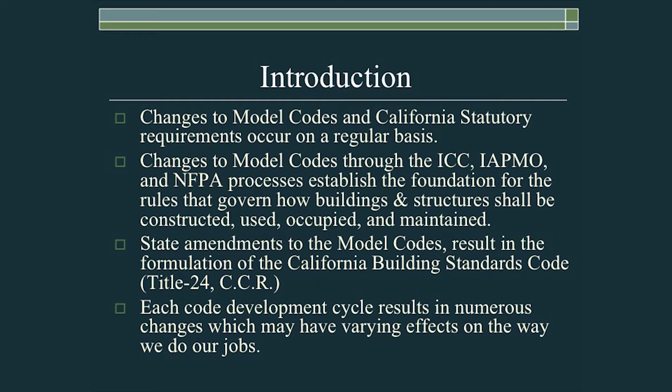Changes to model codes and California statutory requirements occur on a regular basis. Changes to model codes through the ICC, IAPMO, and NFPA processes establish the foundation for the rules that govern how buildings and structures shall be constructed, used, occupied, and maintained. State amendments to those model codes result in the formulation of the California Building Standards Code, or Title 24, of the California Code of Regulations. Each code development cycle results in numerous changes which may have varying effects on the way we all do our jobs.

Every triennial California code cycle is typically preceded by one or more comprehensive classes addressing significant changes. They're often presented by CALBO, ICC chapters, and various city and county jurisdictions. They tend to cover a really broad range of topics, including code changes which may not have an impact on your jurisdiction. Typically, these classes will be available later this year, starting in November, sometime around that point.

They generally require attendance at a full or half-day seminar, thereby taking staff away from their primary plan check or inspection duties. So, is there a quicker way to focus on the upcoming code changes that are most likely to affect you? It's actually why we're here today.

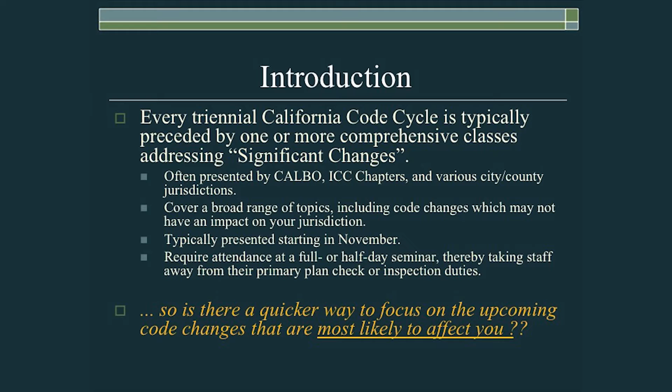The following changes to either the model codes or California codes have been selected because they are likely to affect most designers, builders, and code officials here in California. However, after publication of the codes, further exploration of the 2016 California codes is surely encouraged to identify other changes that may also affect specific projects.

There will be several comprehensive significant changes resources that have been developed by noted experts, and they will be available for those who would like a broader exposure to the changes we can expect in 2016. Let me talk about them very briefly.

First, the significant changes to the California Building Code. This is a fantastic resource. Paul Armstrong, Doug Thornburg, John Henry, and Jay Woodward, as we all know, are very familiar at developing these significant changes resources. And as they have in the past, they've done another outstanding job in developing this significant changes resource. So for those of you that will be interested in a broader exposure to the changes to the California Code, I will encourage you to take a look at this resource when it is available.

Similarly, significant changes to the California Residential Code, another resource that will soon be available. Both Paul Armstrong and Stephen Van Note have teamed up to develop this resource, and just as in past years, it's an outstanding resource that will cover all of the changes for even those jurisdictions that do deal with some of the less frequently encountered changes to the code. Great resource, and I'll be talking about that later.

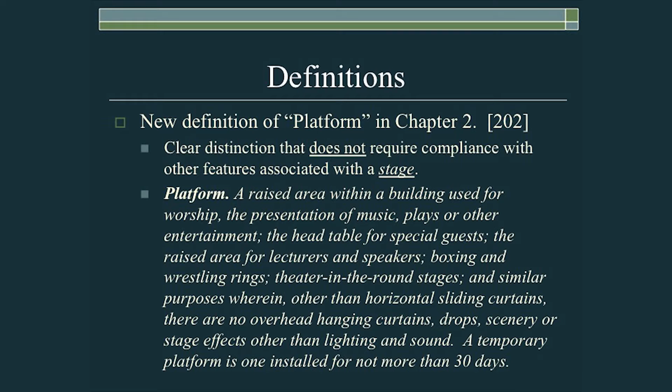Platform is now defined as a raised area within a building used for worship, the presentation of music, plays, or other entertainment, the head table for special guests, the raised area for lecturers and speakers, boxing and wrestling rings, theater in the round stages, and similar purposes wherein, other than horizontal sliding curtains, there are no overhead hanging curtains, drops, scenery, or stage effects other than lighting and sound. A temporary platform is one installed for not more than 30 days. This new definition may be useful when you encounter these sorts of things in your projects.

Another change: commercial kitchens. Our new code has a new classification for food processing establishments and commercial kitchens that are not associated with a restaurant. Sections 304.1 and 306.2 deal with this. Basically, if that cooking area is less than 2,500 square feet, they may be classified as a Group B occupancy. If larger than 2,500 square feet, they need to be classified as an F1 occupancy. Regardless of size, commercial kitchens associated with restaurants are classified as a Group A2 occupancy.

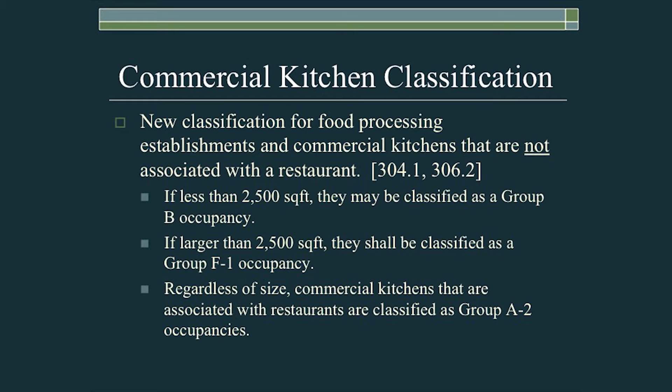Getting back to the main definition, this new classification for food processing establishments or commercial kitchens not associated with a restaurant could be something like your walk-in, takeout, pizza type places where there is no restaurant where people sit down and eat, but it is clearly a food processing facility. If it's less than 2,500 square feet, it would be a Group B occupancy, and you wouldn't have to classify it as an A2.

Accessory storage spaces has changed slightly, and you need to be aware of this particular change. Section 311.1.1 now requires that, in addition to accessory space having an aggregate area limitation of 10% of the floor area, individual storage spaces are limited to a maximum of 100 square feet if they're going to be considered accessory to the main use. If the individual storage space is larger than 100 square feet, it should be classified as a Group S occupancy, presuming that the type of hazard exposure is rather low, probably a Group S2 occupancy.

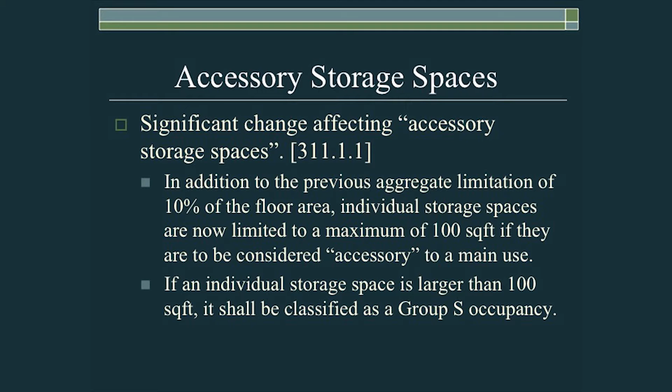The significance of this is that in a lot of areas, especially some large areas, there previously might be a storage area which, while less than 10% of the area of the main use, could still be over 100 square feet. Section 311.1.1 now has this limitation that in addition to the aggregate area, the individual area has to have a maximum of 100 square feet. So make sure that when you're looking at these new accessory storage areas, you measure those and assign the occupancy accordingly.

Egress through an atrium has changed. Egress through an atrium is now limited slightly on upper floors, that is, floors above the level of exit discharge. If you want details, take a look at section 404.9. In effect, the change now indicates that on levels other than the level of exit discharge, the maximum exit access travel distance is limited to 200 feet, regardless of whether or not the building is fully sprinklered.

We're all familiar with exit access travel distances, and you know that in Chapter 10, exit access travel distance is allowed to be extended based on occupancy and whether or not the building is provided with an automatic sprinkler system. This new provision indicates that if this exit access travel distance is occurring within an atrium environment, on a level other than the level of exit discharge, that sprinkler exit access distance increase would not be allowed on those levels. You still need to make sure that the exit access travel distance above the level of exit discharge is limited to 200 feet.

So in your typical atrium type hotel, or if you have an office building with a large atrium space, if exit access on upper floors is occurring through those upper levels, even in fully sprinklered buildings, make sure that they get to that protected exit enclosure within 200 feet.

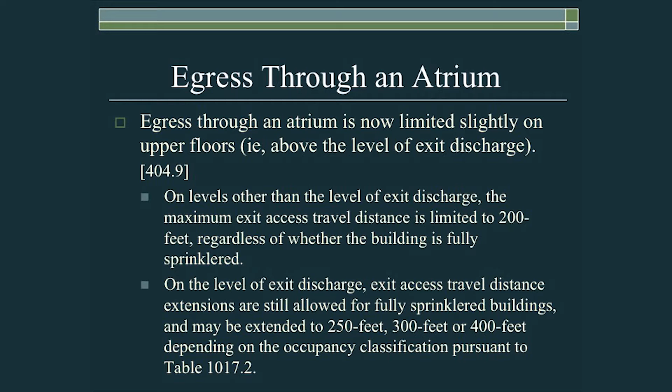Now on the level of exit discharge down below, exit access travel distance extensions are still allowed for fully sprinklered buildings. Depending on table 1017.2, depending on which occupancy you have, that may be extended to either 250 feet, 300 feet, or 400 feet as appropriate for the occupancy. But that would be on the level of exit discharge only.

Exit through an atrium has another change, and this is very significant.

Termination of the interior exit stairways has been clarified to prevent merging of separate stairs into a common atrium space. Section 404.10 has now been modified so that no more than 50% of interior exit stairs may terminate into an atrium at the level of exit discharge. The remainder of interior exit stairs must maintain separation from the atrium environment.

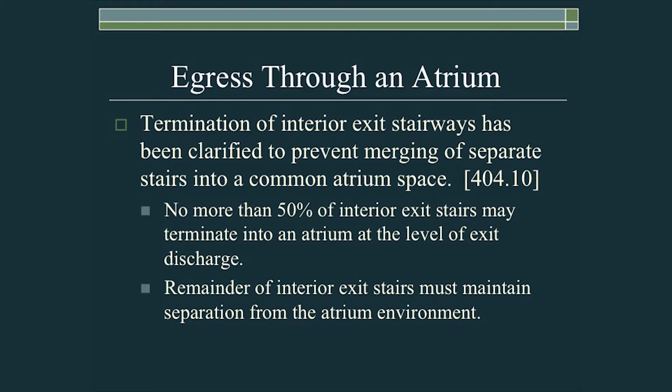Let's take a look at a diagram and see what this means. The intent is to see to it that we don't have all of the required interior exit stairways merging into a common atrium environment at the level of exit discharge, because if that were to occur, if the atrium space was compromised by fire, smoke, or some other situation, all the exits could conceivably be blocked.

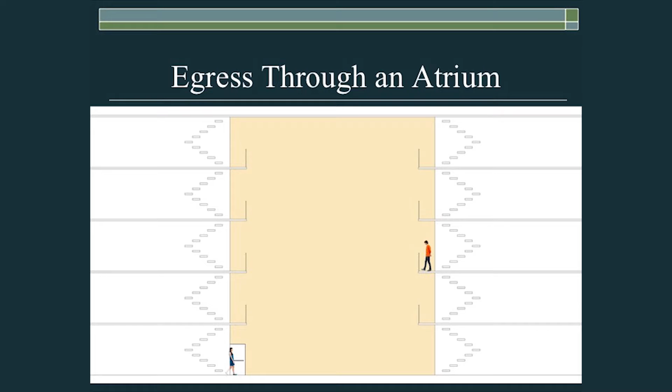So this particular section now would allow this exit here on the left to discharge into the atrium space, but an interior exit stairway over here would have to exit independent of the atrium. This will guarantee that all of the exits don't merge through an atrium.

Explosives and fireworks has been addressed by the CBC through the elimination of previous section 434 that relates to explosives. Basically what's happened is CBC section 434 has been replaced by a reference to the California Fire Code, Chapter 56.

While most jurisdictions don't encounter this very often, it is somewhat important to keep this in mind because of the need for jurisdictional awareness of sporting goods and other Group M occupancy retail facilities that might be dealing with large quantities of ammunition, smokeless powder, and other supplies that are often used for reloading ammunition.

There are some rather severe quantity limits on that, and if you do have these types of occupancies, and we're expecting to find those provisions in section 434, they have been eliminated from the California Building Code, and there is now a pointer to the Fire Code, Chapter 56.

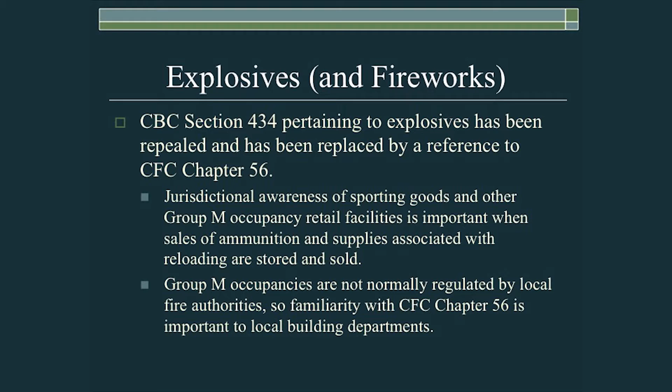I would like to remind everybody that while Group M occupancies are not normally regulated by local fire authorities, if you do have situations where large quantities of these materials are being utilized in some of your specialty sporting facilities, definitely engage your fire department or your fire prevention bureau.

Let's take a look. If you take a look at Chapter 56 of the California Fire Code, for which there's now a pointer, you will see that there are new standards here, and basically what it comes down to is there are some exceptions, and right here in item number 4, it deals with some of the quantities that you need to pay attention to.

Once again, if you do encounter some of these occupancies within your jurisdiction and you were expecting to find these provisions in Section 434 of the Building Code, they're not there anymore. Engage the assistance of your fire prevention staff and turn to Chapter 56.

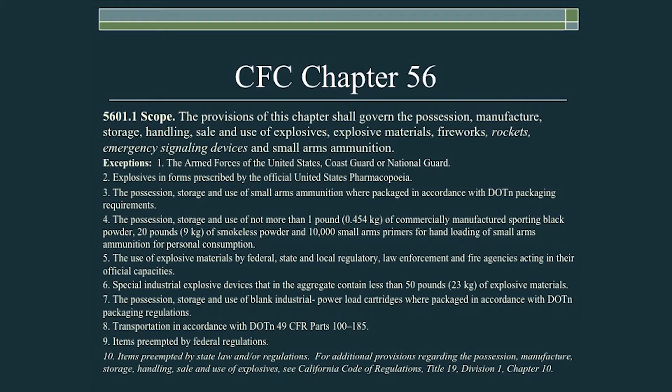Height and area has been adjusted slightly, and I think it's been done in a manner which helps simplify things. The allowable height and area provisions have been reformatted in tables 504.3 for height, 504.4 for stories, and 506.2 for area, which now includes benefits for automatic fire sprinklers.

In our current version of the California Building Code, all of these are contained within Table 503 and a series of equations which allows the user to determine what the allowable areas, heights in stories, and absolute height in feet are. It's been reformatted in our new code to break out Table 503 into 3 separate tables.

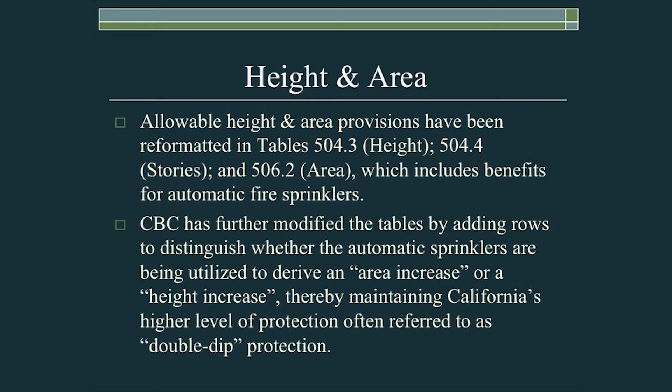The California Building Code has further modified these tables by adding rows to distinguish whether automatic sprinklers are being utilized to derive an area increase or a height increase, thereby maintaining California's higher level of protection, which is sometimes referred to as double dip protection.

So let's take a look. This is a portion of Table 504.3, and you'll see that this table provides information regarding the allowable building height in feet as measured above grade plane. The column on the left identifies the occupancy classification, and then the rest of the table off to the right identifies what that allowable tabular height is in feet above grade plane based on type of construction.

You will see that this second column here has a bunch of codes, like S, and so forth. What these represent is whether a particular occupancy is provided with sprinklers, if it's non-sprinklered, or in some instances, if it is sprinklered without taking an area increase, or if it is sprinklered and utilizing an area increase. You would use the corresponding information off to the right of the table. So this is how, in Table 504.3, the new code is integrating sprinkler information into the table itself.

As I mentioned, for certain occupancies regulated by the State Fire Marshal's Office, the table has been amended to address whether or not those sprinklers are also being used for an area increase.

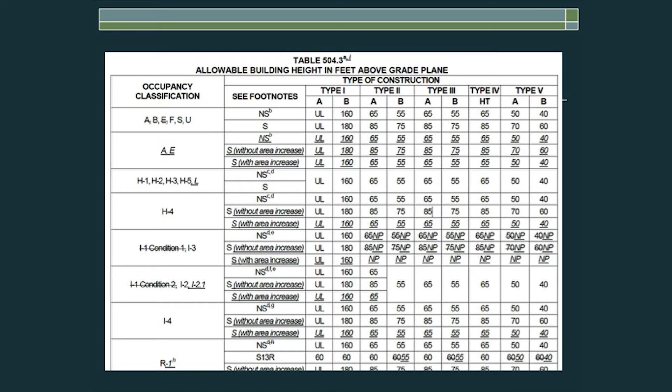If we move on to Table 504.4, this table identifies the number of allowable stories that would be allowed for a particular occupancy classification based on the type of construction. Just as we saw in the previous table, the determination on the number of stories is also affected by whether or not that building is provided with sprinklers, whether it's non-sprinklered, and then here in California, for certain occupancies, whether or not those sprinklers are also being used to derive an area increase, or if they are not.

As an example, since Group A occupancies are regulated through the State Fire Marshal's Office, if there was a Group A2 occupancy and the building was sprinklered, but the sprinklers were not being used for an area increase, the middle row for the A2 occupancy would be utilized to determine how many stories, because this indicates the building is sprinklered without utilizing an area increase. If that same building was fully sprinklered, but utilizing an area increase, the bottom row would be used to determine how many stories would be allowed.

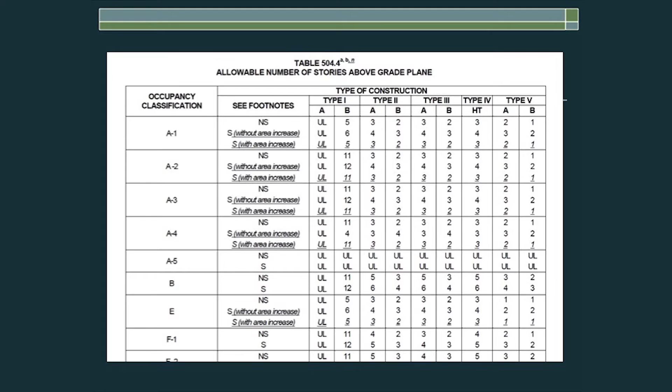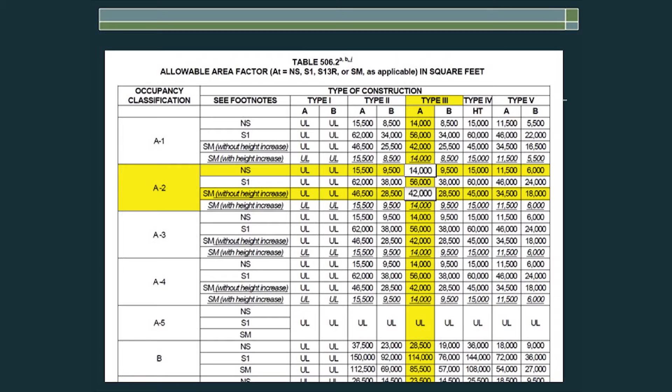I also want you to take a look at this value for a non-sprinklered building, 14,000 square feet. Because if we go ahead one slide and plug it into the equation, the tabular value utilizing sprinklers would be used for this parameter, A sub t. Then we would add the non-sprinklered area value multiplied by any applicable frontage increase factor. That's how you determine the allowable area for a single story, single occupancy building.

Now, if we have a multi-story building, we basically take the same approach, starting with that tabular area, including whether it may be increased because the building is sprinklered or not. We add the non-sprinklered allowable area multiplied by any frontage increase they might be entitled to, and we multiply that times a story factor. The story factor is the actual number of stories of a multi-story building, up to a limit of 3.

With the exception that in California, for A, E, H, I, L, and R occupancies and high-rise buildings, the story factor is limited to 2.

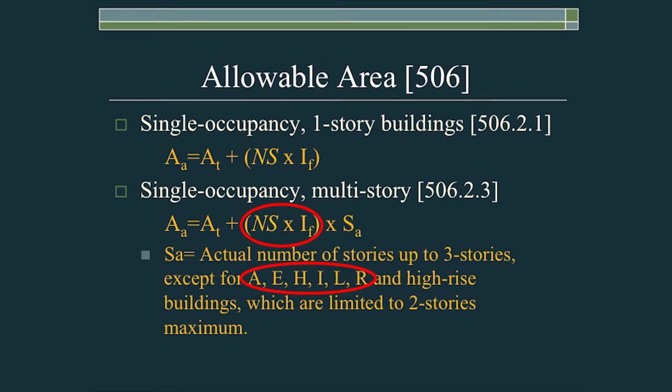So if I had an occupancy other than A, E, H, I, L, or R, and it was 4 stories, I would get to multiply this component, NS, times the frontage increase factor, by 3, because while it's a 4-story building, the story factor would be limited to 3. If that was an A, E, H, I, L, or R occupancy building, my story factor would be limited to 2.

So in effect, the height and area has been simplified in California by breaking the previous Table 503 into 3 separate tables, but the ultimate area, number of stories, and absolute height in feet is essentially the same as what we've had before. It's just another method of doing it, and it simplifies it slightly.

Separation of incidental uses. Fire resistance rated separation between the main and incidental uses has been reformatted slightly in Table 509. The concept is still the same. Certain spaces within buildings, due to what occurs within those buildings, may expose adjoining areas to certain levels of risk and do have to be separated in a certain fashion.

And Table 509 does identify how those incidental uses shall be treated. Most of the changes affect only Group I2 and I2.1 occupancies, and the level of protection in incidental use areas, whether through fire-resistive construction or sprinklers or a combination of both, is essentially the same for the other occupancies. But for Group I2 and I2.1, it has changed slightly.

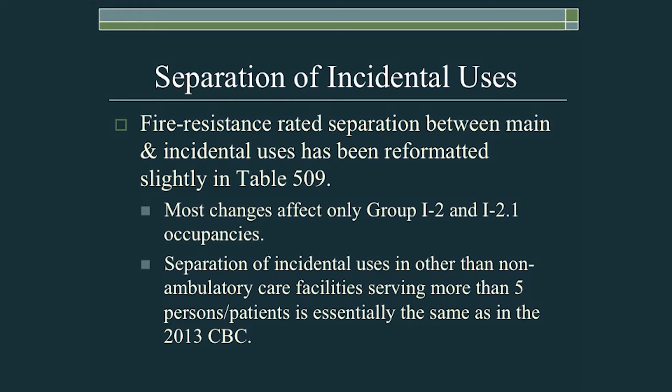So the separation of incidental uses in other than non-ambulatory care facilities serving more than 5 persons and patients is essentially what we're accustomed to in the 2013 CBC.

This is what Table 509 now looks like, and if you take a look at the middle of the table, this is where we start to see areas that deal with Group I2 laundry rooms, Group I3 jail cell facilities, Group I2 physical and plant maintenance shops, and so forth. And this is where it's been clarified slightly.

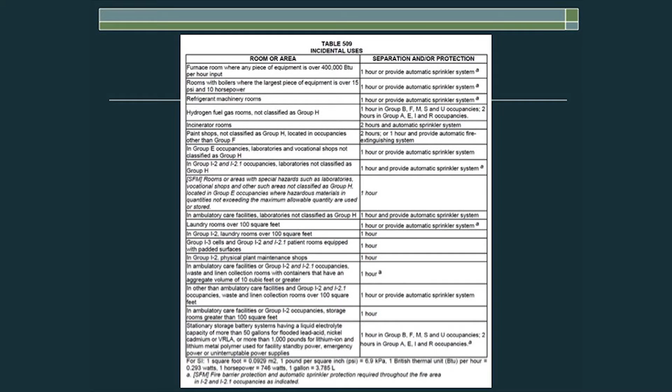In the upper and lower portions of Table 509, it's virtually identical to what we've had for incidental uses in the current code.

Podium construction has now changed. There are some significant changes to podium construction, and for those jurisdictions that do have this type of construction, and we're seeing a lot of it throughout California, those changes are actually very, very welcome because it simplifies and facilitates some of the trends and methods of construction that we've been seeing for the past couple of years.

The first change I'd like to talk about is rather significant, and it's a revision that allows multiple stories allowed below that 3-hour occupancy separation. Under our current code, the 2013 CBC, the first level above grade plane up to the podium is actually limited to only 1 story in height. So a trend to try to get multi-story occupancies below that podium has actually run into a problem with the code. The code now has a provision which will allow multi-story construction below that podium.

So some of the things that you may be seeing in your jurisdiction are now going to be allowed by right through the code. Furthermore, any occupancy other than Group H is now allowed in that Type 1 portion of the building located below the 3-hour occupancy separation.

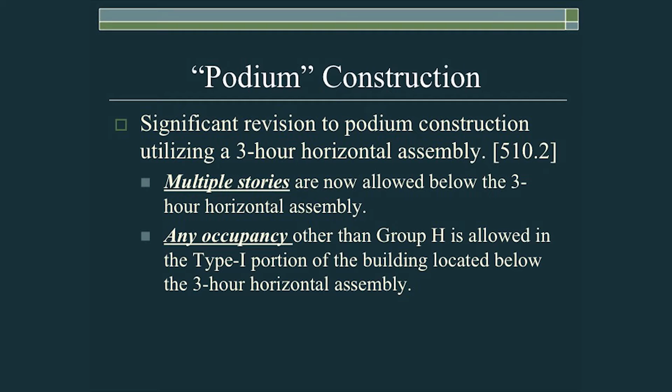So let's take a look. If we take a look at the picture on the left, this is what we're accustomed to. As you can see down at street level, we're accustomed to these podium-type buildings with a single-story limitation for the Type 1 portion located below that 3-hour fire resistance rated separation.

That's been eliminated now. What we get now is if you take a look at the image on the lower right, if we have the podium at this level, you will see that you can have multiple stories below that podium. And what that does for us is it allows the current trend of having multi-story establishments below that level. Some designers like to have multi-story restaurants and other facilities down at the street level, retail level, and the code will now allow that. And then, of course, new construction up above.

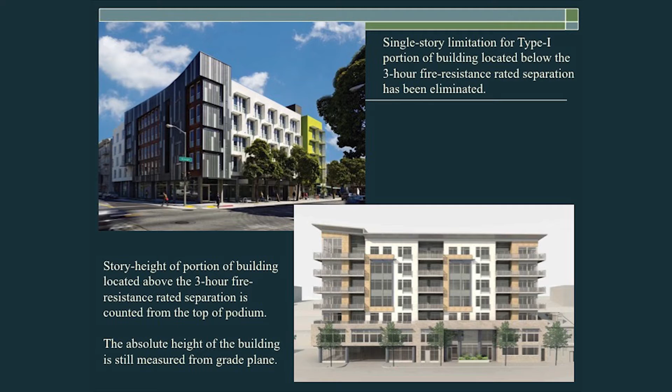Generally, we see either Type 5 or Type 3 construction up above. The code still allows for that. The absolute height of the building, I would like to remind everybody, for this upper portion is still measured all the way down to grade plane, while the number of stories, of course, is measured from the top of the podium deck.

Fire sprinkler substitution change doesn't affect too much construction here in California, but it is a change that I want to bring everybody's attention to, and that is an elimination of automatic fire sprinkler substitution for 1-hour construction.

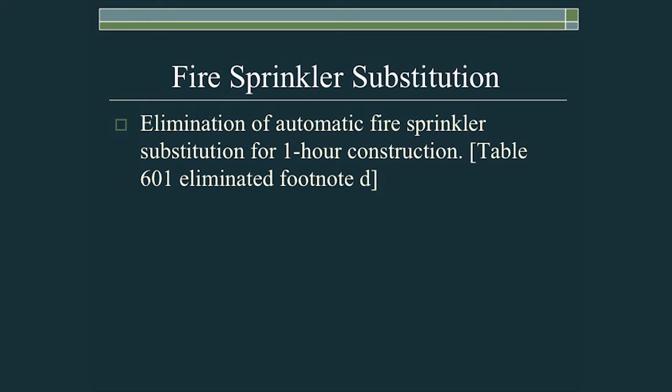Currently, Table 601 has a footnote, footnote D, which if you were to open up the current code, would indicate that if you have a building provided with an automatic sprinkler system, and those sprinklers are not being utilized for some other requirement under the code, the mere fact that that building is provided with sprinklers would allow those sprinklers to substitute for 1-hour construction. This footnote has been eliminated, so 1-hour sprinkler substitution is no longer allowed in the code.

For the most part, that's not a big deal in California, because those sprinklers are generally being used for some other benefit, whether it's for an area increase, a story height increase, or an increase in the overall height of the building. Those sprinklers typically are being used for some other purpose, in which case that footnote wouldn't have any applicability, but it has been eliminated nonetheless.

Table 602 has been expanded to now include a column to identify dimensional equivalencies for structural composite lumber. Cross-laminated timber is now expressly allowed as well for Type 4 construction. There is no column in the table for CLT because the prescribed heavy timber sizes must be matched by the actual CLT dimensions. Solid sawn lumber and glued laminated lumber dimensions remain unchanged. So let's take a look at that table.

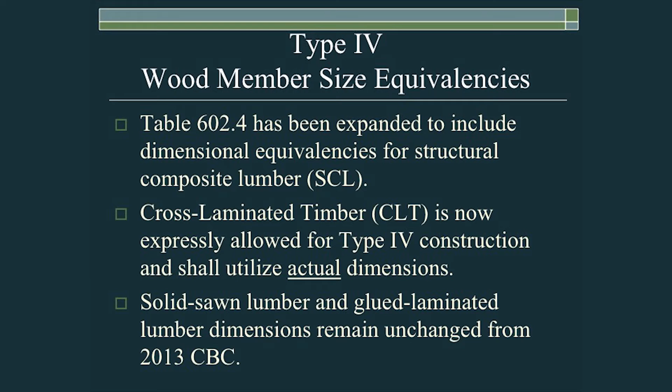Table 602.4 has been expanded. Off to the right, you now see minimum structural composite lumber net sizes. Whereas the table previously only had heavy timber dimensions for solid sawn lumber and for glued laminated lumber, if you have SCL lumber, you will find the dimensions there. And as I previously mentioned, cross-laminated timber is allowed for Type 4 construction - you just have to use the actual sizes.

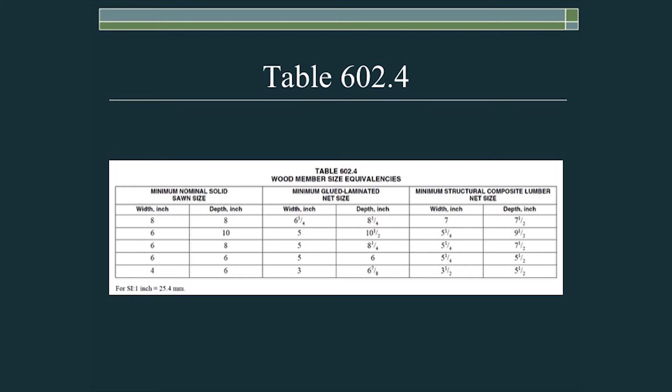As an example, if you have a load-bearing column in heavy timber construction for Type 4, the minimum dimensions would be 8 by 8. If it is a solid sawn member, you would use an 8 by 8, and the dressed finished size of that lumber is slightly smaller than that, and that would be permissible. If it was a glued laminated member, the width would have to be at least 6 3/4 inches by a depth of 8 1/4. If it was structural composite lumber, the minimum width would be 7 inches, minimum depth would be 7 1/2 inches, and with CLT, a load-bearing column would have to have actual dimensions of 8 inches by 8 inches.

Projections have been modified in the building code. Table 705.2 has changed, and in some instances it has a rather significant effect on allowable projections. Basically, projections from exterior walls of buildings are required to observe a greater fire separation distance when exterior walls are located more than 3 feet from a property line.

To see exactly what effect this is, we can compare Table 705.2 from our current 2013 CBC to the new Table 705.2 that we will see in the 2016 CBC. Comparing these two tables, in the current 2013 CBC, the fire separation distance between 2 and 5 feet would allow for a minimum separation of that projection of 24 inches to a property line or whatever reference is being used to measure that fire separation distance.

Instead of going from 2 to 5 feet, that's changed. In the 2016 CBC, when you have a fire separation distance greater than 2 feet but up to 3 feet, that distance between your property line and the edge of that projection is still 24 inches, but then at 3 feet, it all starts to change. From 3 feet to less than 30 feet, you start at 24 inches, but then you add 8 additional inches for every foot of required fire separation distance beyond 3 feet or fraction thereof. Then at 30 feet or greater, which would generally be Type 1 construction, your projections have to be 20 feet from that property line or from whatever reference you're using to measure fire separation distance.

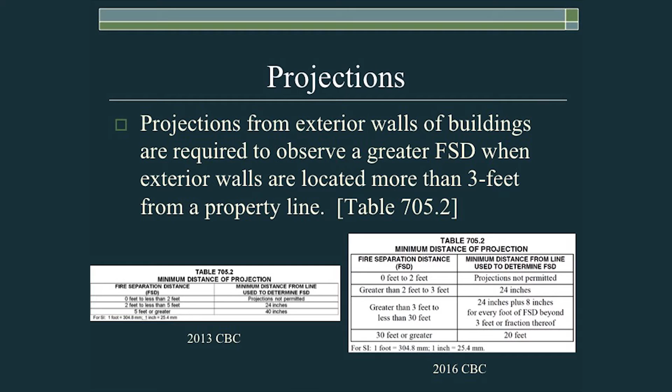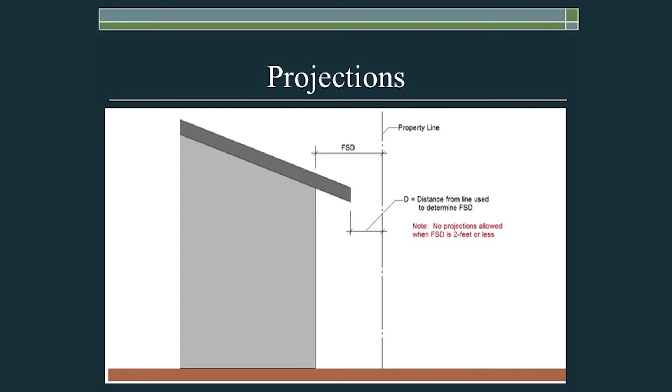This can have a very significant effect on where projections can be—take a look at table 705.2 and this diagram. The exterior wall of a building is where the fire separation distance is measured, but the distance a projection extends must be measured from the edge of that projection to the property line or whatever line is used to measure fire separation distance. No projections are ever allowed within 2 feet. In the 2016 CBC, projections from buildings are likely to be pushed back further from property lines than they're allowed right now.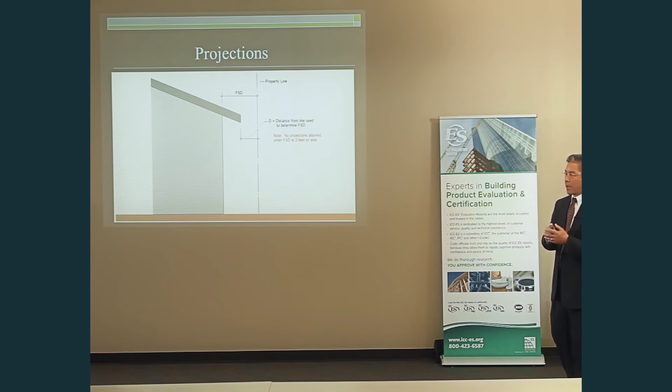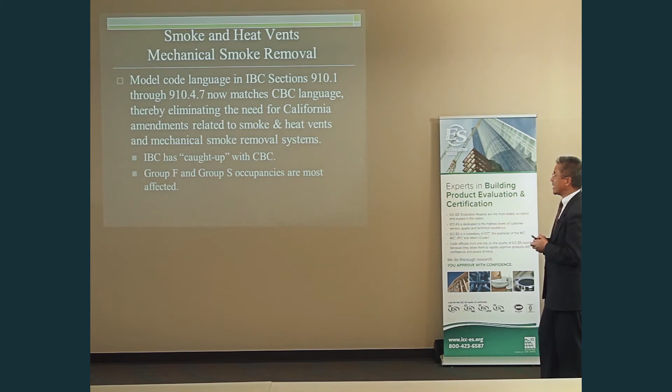Smoke and heat vents and mechanical smoke removal: this change is actually a model code change in IBC Section 910.1 through 910.4.7. The IBC now matches what we currently have in the 2013 CBC—in a sense, the IBC has caught up with a provision we already have. This won't change anything for those of us enforcing the CBC this past cycle, but for those dealing with the IBC, including designers and architects working outside California, 910.1 through 910.4.7 has changed, affecting Group F and Group S occupancies most, as we'll see in the next slide.

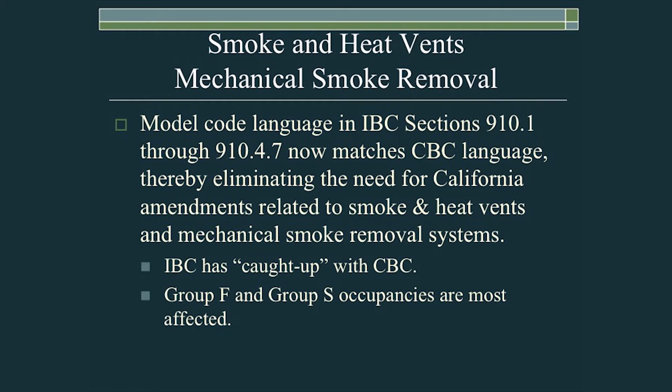It affects those occupancies most because 910.2.1 requires Group F-1 and S-1 occupancies having more than 50,000 square feet to be provided with some type of smoke removal device, whether an automatic smoke and heat vent or a mechanical smoke exhaust. It really depends on whether the building is one story or multi-story, and whether you have access to put a smoke hatch or heat vent on the roof.

There's really no significant change for those of us in California since our past code already had these provisions. Looking at a summary of those requirements: a smoke vent or heat vent in a building should be at least 20 feet from either a property line or a firewall splitting the building into separate areas, and at least 10 feet from fire barriers. They should be uniformly located throughout the space to effectively remove smoke and heat.

To determine the aggregate area of vents needed, that area is determined by dividing the volume of the building—floor area multiplied by ceiling height—by 9,000 if the building has an automatic sprinkler system. If the area doesn't have an automatic fire sprinkler system, the total aggregate vent area is determined by simply taking the floor area of that space and dividing it by 50.

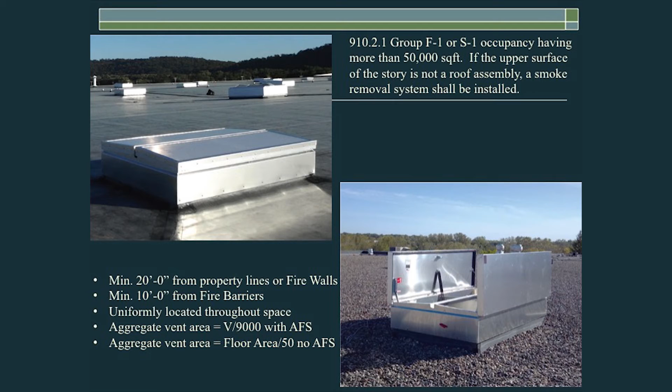Large family daycare homes have seen a slight change here in California—more of a clarification to make sure things are done right. Language has been changed to clarify the requirement for a manual device in large family daycare homes that shall actuate a fire alarm signal audible throughout the facility. It was previously deemed too vague: what constituted a manual device, and what does actuation of a fire alarm signal really mean?

The 2013 CBC language has now been changed and slightly clarified. At the bottom of this slide we see what 907.2.6.4 will say: every large family daycare home shall be provided with at least one manual fire alarm box at a location approved by the authority having jurisdiction. Such device shall actuate a fire alarm signal audible throughout the facility at a minimum level of 15 dB above ambient noise level. These devices need not be interconnected to any other fire alarm device, have a control panel, or be electrically supervised or provided with emergency power.

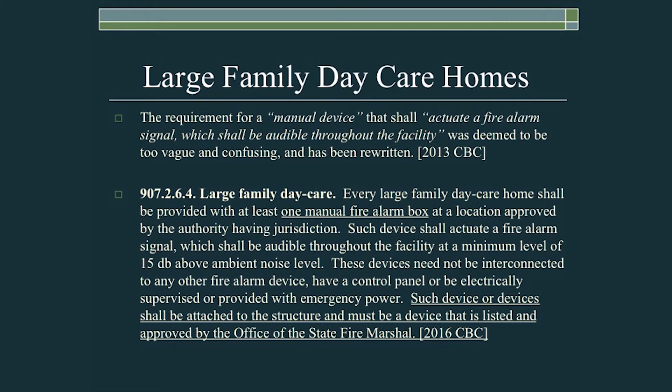The reason that the device being attached to the structure and being listed by the State Fire Marshal's office is important is that if you look at the previous language, there's nothing that said you actually had to have a fire alarm box permanently affixed to a building. Some people managing large family daycare homes felt that if they had a fob in their pocket that could set off the alarm system, that would be sufficient. Of course, if they set it down and forget where they put it, and a problem occurs, they don't know where it is to actuate that alarm. But if there is a device attached to the structure, it will be in a location they're familiar with, and they can set off that alarm.

Carbon monoxide requirements have changed significantly, and you need to be aware of this. Section 915 has been added to the IBC, which now establishes extensive requirements for carbon monoxide detection. Previously, in California, we had Section 420.6. That has now been eliminated because the new Section 915, added to the IBC, now has all of the provisions that we need.

Basically, what we're looking at is residential carbon monoxide detection provisions in buildings containing covered multifamily dwellings as defined in Chapter 2. All required carbon monoxide alarms also need to be equipped with the capability to provide visible alarm notification. This links back to what happens for audibly impaired individuals, whether it's a strobe or some other feature. Section 915.7 will be addressing that.

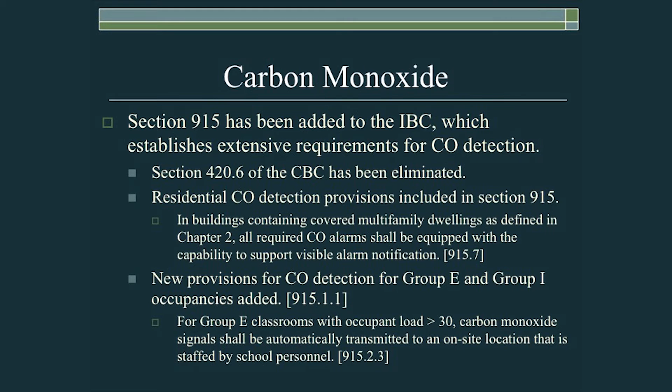There are also new provisions for carbon monoxide detection for Group E and Group I occupancies. We didn't have that before, but now in Section 915.1.1, there is a provision, so if you have a Group E and Group I occupancy, you might need to add carbon monoxide detection. Part of that includes the following: for Group E classrooms with occupant loads greater than 30, carbon monoxide signals shall be automatically transmitted to an on-site location staffed by school personnel. That's new Section 915.2.3.

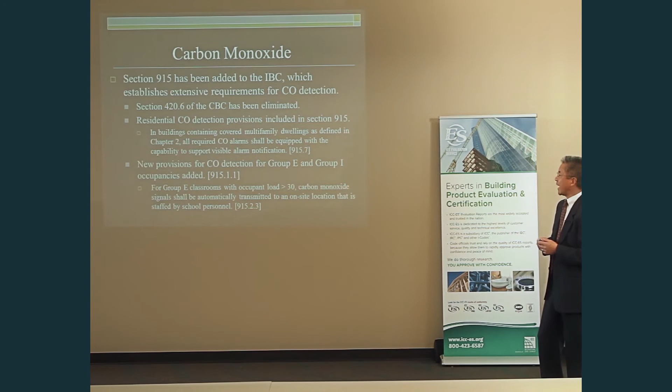So in summary, Section 915 has been added to the code with all of the provisions we're familiar with for carbon monoxide detection in residential buildings, and it now adds provisions for Group E and Group I occupancy buildings as well. It also reminds us that if we have covered facilities, we have to have the capability to support a visible alarm.

Let's talk about location of smoke alarms. Smoke alarm location standards of NFPA 72 related to the proximity of fixed cooking appliances and bathtubs and showers has been added to IBC Section 907.2.11.3. Previously, certain portions of NFPA 72 were reprinted in the CBC for reference, and they essentially included these provisions. That reprint of NFPA 72 has been eliminated, and IBC Section 907.2.11.3 now has all of those provisions for us.

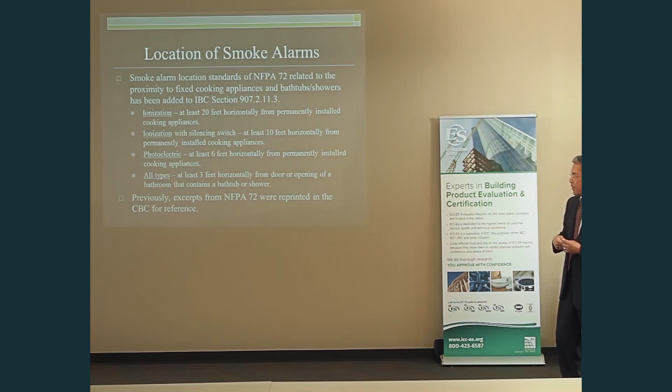For building inspectors who go out and inspect buildings and try to determine whether a smoke alarm is located in the correct location based on the type of alarm, Section 907.2.11.3 is going to have those parameters. In summary, if that smoke alarm is an ionization-based smoke alarm, it should be located at least 20 feet horizontally from permanently installed cooking appliances.

However, if it's an ionization-based alarm and it has a silencing switch, that smoke alarm can be located within, or at least 10 feet horizontally from, a permanently installed cooking appliance. So it can be located about half as far away, just by virtue of having a silencing switch. If it is a photoelectric type smoke alarm, then it has to be located at least 6 feet horizontally from a permanently installed cooking appliance.

So depending on the configuration of a space and where cooking appliances are, if there is not sufficient room to place a smoke alarm at least 20 feet away, whether it is equipped with a silencing switch or is a photoelectric type smoke alarm, they can be located closer. Regardless of whether it is an ionization-based alarm or a photoelectric alarm, they should be located at least 3 feet horizontally from any door or opening that leads to a bathroom that contains a tub or shower. That's to prevent a false detection due to steam.

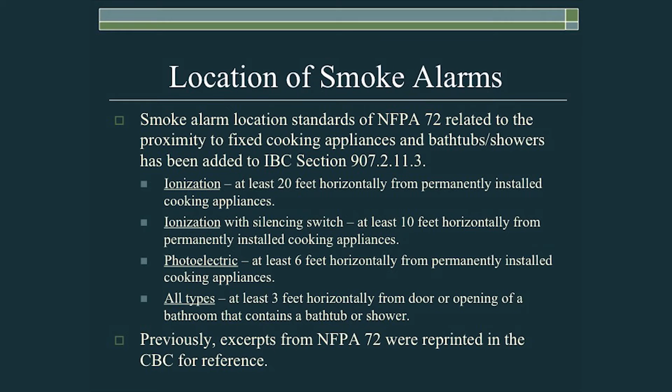So let's take a look at a diagram. I put this diagram together to put all of these requirements visually into one image.

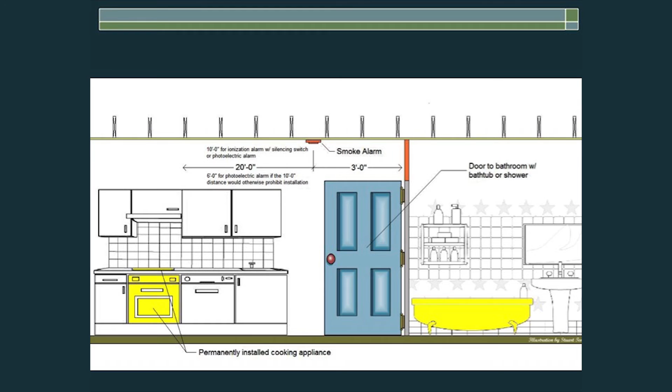What we're looking for here on the left: if you have a fixed, permanently installed cooking appliance, the smoke alarm should be located either 20 feet away if it's ionization-based, or 10 feet away if it's ionization-based with a silencing switch. If it's photoelectric, it only needs to be separated 6 feet away, and it should be located at least 3 feet from a door to a bathroom with a bathtub or shower. Some folks have punched holes in this picture and put it right in their code book because visually it's an easy way to sum up these requirements.

A new change to the code addresses assembly occupancies on the roof of a building. 903.2.1.6 has been added, requiring that where an occupied roof has an assembly occupancy with an occupant load exceeding 100 persons for a Group A2 occupancy, or exceeding 300 persons for any other Group A occupancy, all floors between that occupied roof and the level of exit discharge must be equipped with a fire sprinkler system in accordance with 903.3.1.1 or 903.3.1.2.

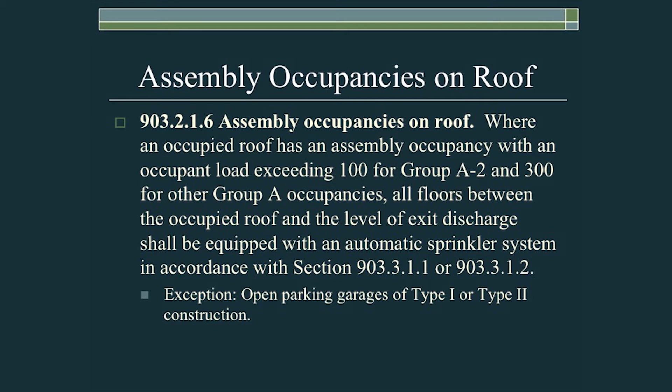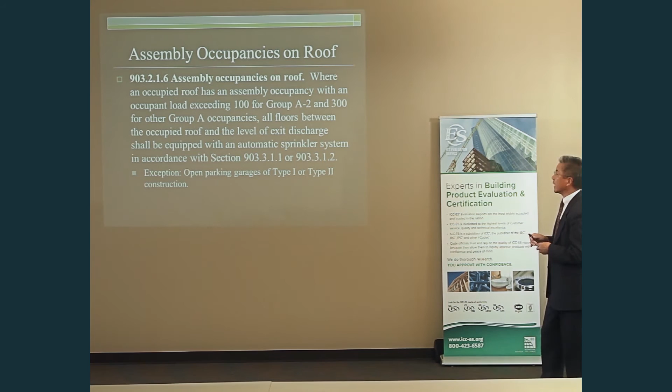There's an exception to that. Open parking garages of either Type 1 or Type 2 construction may still have an assembly on top, and you don't have to sprinkler those spaces below unless required by some other portion of the code. This is important because if you have an existing building that is not currently sprinklered and you want to introduce a Group A2 occupancy, say a restaurant or rooftop dining on top of that building, it might trigger sprinklers on the floors below.

Chapter 10 has been rearranged and some provisions have been merged together. Most egress provisions remain essentially the same, but there are some interesting changes I want to bring to your attention. Some important changes affect delayed egress, two-way communication, locks on main exits, and we'll talk about some others as well. First, let's talk about delayed egress.

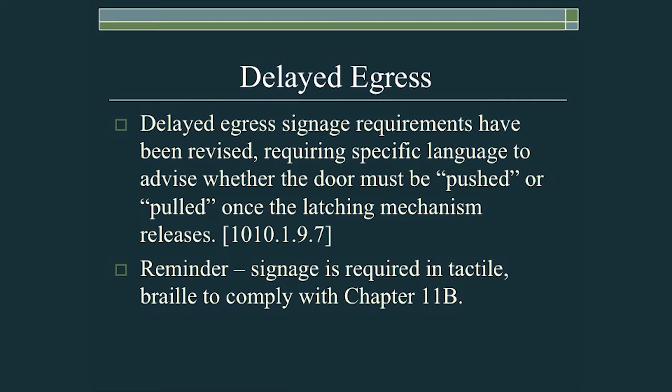Delayed egress signage requirements have been revised, now requiring specific language to advise whether the door must be pushed or pulled once the latching mechanism releases. Section 1010.1.9.7 contains the language which must be included, and there's also a reminder that the signage is required to be in tactile braille to comply with Chapter 11B. Let's take a look at the next slide and see what this new signage requirement is.

The code now indicates that for doors that swing in the direction of egress, the sign shall read, 'Push until alarm sounds. Door can be opened in 15 seconds.' Now, if that door swings in the opposite direction, toward the person leaving the room, the sign needs to read, 'Pull until alarm sounds. Door can be opened in 15 seconds.'

While most doors swing in the direction of egress travel based on occupancy and occupant load, there certainly are some instances where an egress door would be allowed to swing toward the person leaving the room. This new signage is important because the latch doesn't release until after it's been pushed for quite a while. If the door needs to swing toward the person and they keep pushing for 15 seconds, they might think the latch hasn't released, because they're pushing when the door should be pulled toward them. That's why the code has changed, requiring this language.

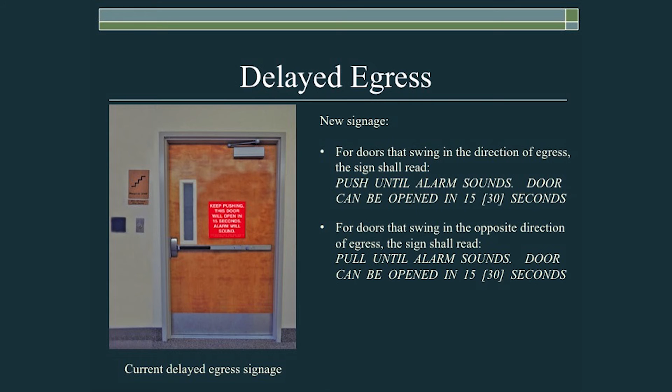The current delayed egress signage is shown on the left, and the sign would say, 'Keep pushing, this door will open in 15 seconds.' In the case of this door, which swings in the direction of egress travel, there would not be a problem. But if this door were to swing in the opposite direction, toward the person leaving the room, this is where the new signage would be important.

Two-way communication requirements have changed. There's now an exception that expressly eliminates the need for two-way communication at elevator landings which only serve freight and service elevators or private residential elevators. This is actually a change to model code language in the IBC that will resolve common errors that have been made by many jurisdictions in the past.

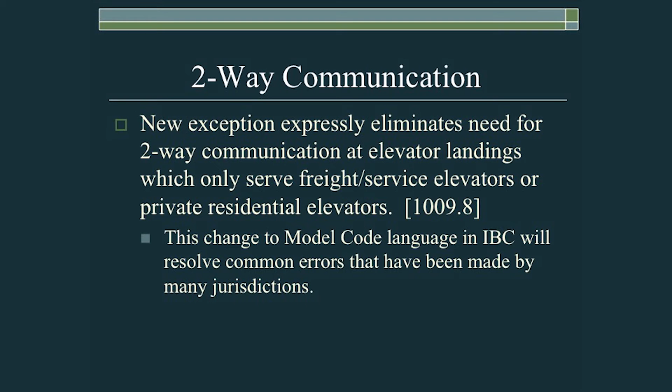1009.8 is a section which clearly does not allow or require this two-way communication in those instances. Right now, under the code, this exemption does not exist. So one could argue that if there was an elevator not used by the general public, say a service or freight elevator, if it was on an accessible level, a strict reading of the code would require two-way communication. Of course, that's not the intent of the code. The intent is that on an accessible level, an individual seeking refuge, waiting to be rescued, would have access to that communication. So 1009.8 has been revised to eliminate that, which will reduce some errors that have occurred in the past.

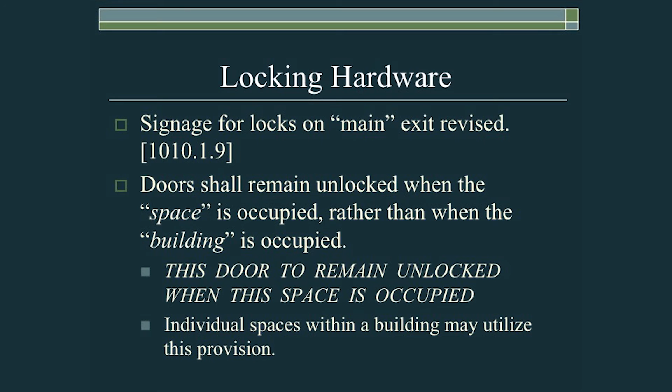Locking hardware. Signage for locks on main exits has been revised. Section 1010.1.9: the recommended language for the 1-inch tall lettering above main exits has changed. While subtle, it helps clarify certain things. The code now says doors shall remain unlocked when the space is occupied, rather than when the building is occupied. The recommended language now states, 'this door to remain unlocked when this space is occupied,' whereas under our current code it states 'when the building is occupied.' Part of the reason this clarification is useful is that some jurisdictions have interpreted the current language to mean that only the main entry door to a building would be allowed to have a certain type of lock or latch, as long as it's unlocked when the building is occupied. The new language makes clear that certain latching hardware is allowed as long as that door remains unlocked while that individual space is occupied.

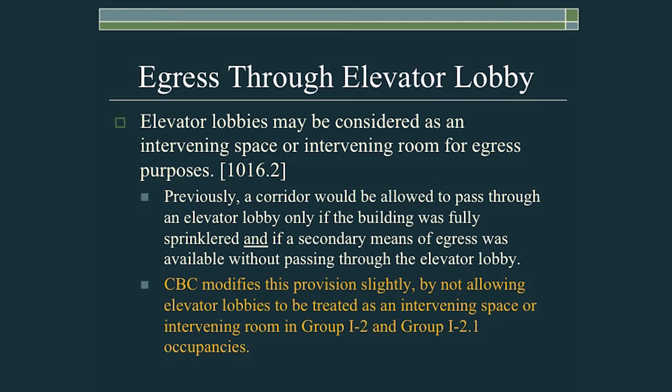Egress through elevator lobbies has been clarified slightly. Section 1016.2 has been modified, and basically elevator lobbies may now be considered as an intervening space or intervening room for egress purposes. So as long as that elevator lobby complies with all the provisions we're accustomed to for any other intervening room that an individual is allowed to pass through as part of their exit access, it would be allowed. Previously, a corridor would be allowed to pass through an elevator lobby only if the building was fully sprinklered and a secondary means of egress was available without passing through that lobby. Now, by thinking of it as an intervening space or room, it's easier to determine whether passage through that space, past an elevator opening, would be allowed. I'd like to draw your attention to the fact that here in California, the California Building Code has modified this provision slightly by not allowing elevator lobbies to be treated as that intervening space or room in group I2 or I2.1 occupancies. But in other occupancies, it would apply.

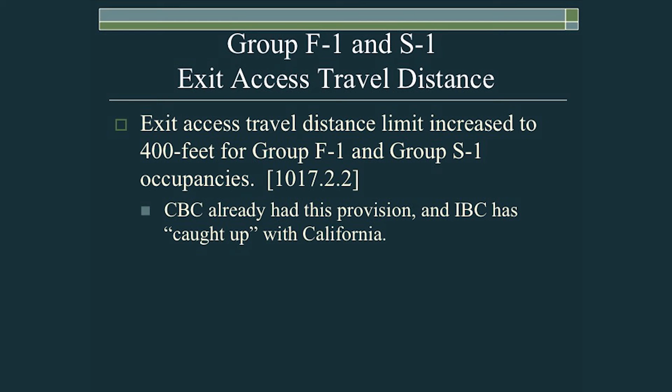For group F1 and S1 occupancies, for jurisdictions that have very large manufacturing and storage spaces, exit access travel distance has changed. We're accustomed to this in California because we have a provision allowing exit access travel distance to be increased to 400 feet for F1 and S1 occupancies, and the model I-code has now caught up to our provision here in the California Building Code. So still for the next cycle as well, if your jurisdiction has very large manufacturing or storage occupancies that fall into the F1 or S1 category, if they're fully sprinklered, rather than the shorter exit access travel distance, they are allowed to go all the way up to 400 feet.

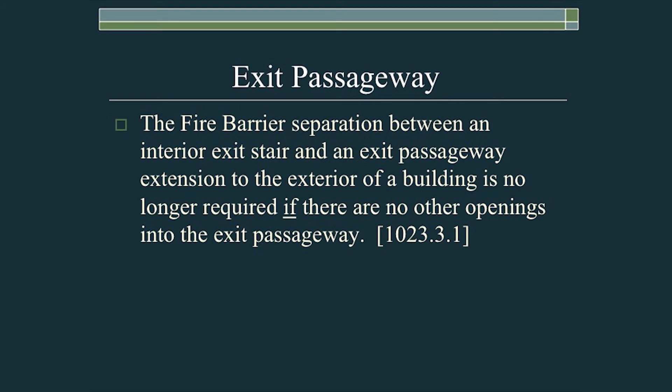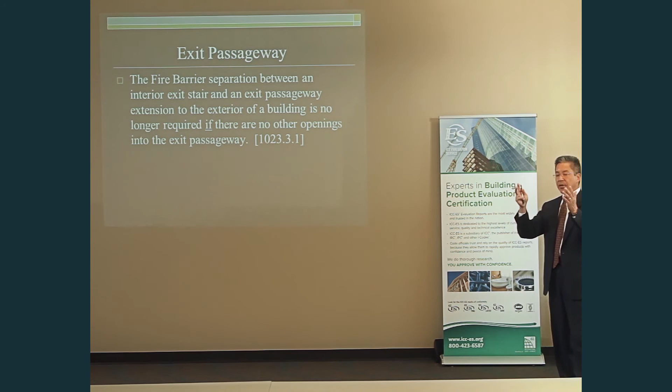For exit passageways, the fire barrier separation between an interior exit stair and the exit passageway extension all the way to the exterior of a building is no longer required, as long as there are no other openings into that exit passageway. As we all know, an exit passageway is not allowed to have any openings into it other than required exits from occupied space. That is still the case, and an interior exit stairway which terminates at the level of exit discharge within the building must still have that exit passageway extension to the exterior of the building.

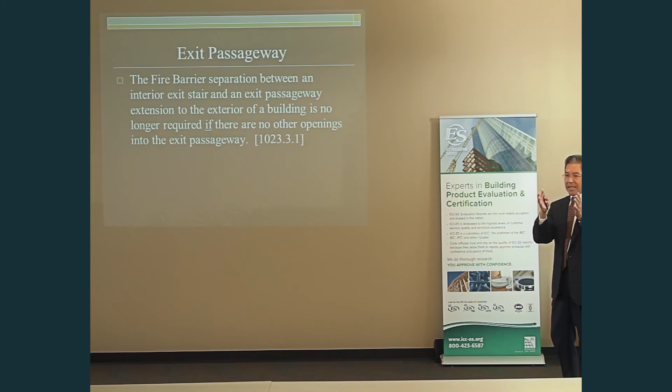If that exit passageway also has other openings that are required exits from occupied space into that passageway, a fire barrier is required to isolate that interior exit stairway from the rest of that passageway. But if that exit passageway doesn't have any other openings between that interior exit stairway and the exterior of the building, the separation provided by that fire barrier is not required. You can just eliminate it. This is a big change.

Here in California, and actually throughout the country, Chapter 34 of the Building Code has been eliminated, so provisions for existing construction have been moved. Here in California, Part 10 of Title 24 now adopts portions of the International Existing Building Code. Specifically, Chapter 4 establishes the prescriptive method, which is pretty similar to what we're accustomed to in the existing Chapter 34 provisions of the IBC. Utilization of the work area method, for those familiar with Level 1, Level 2, and Level 3 alterations, and also utilization of the performance compliance method have not been adopted outright in California. Future versions of the California Building Code, perhaps the next adoption cycle, may consider it. But for now, for the 2016 California Building Code, we are adopting up through Chapter 4, and we won't have to worry about the work area method or the performance compliance methods just yet.

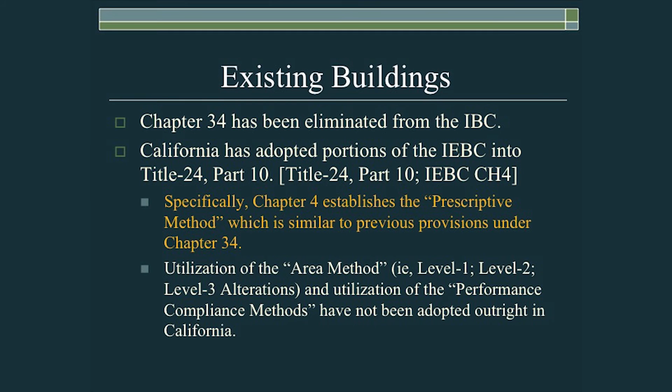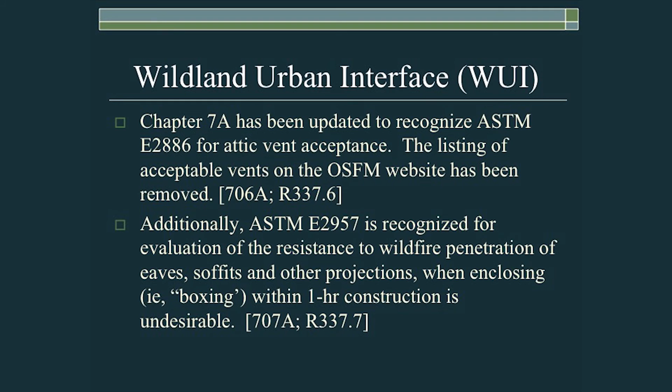There's another ASTM standard I'd like to draw your attention to, and that is ASTM E2957. This is recognized for evaluation of the resistance of wildfire penetration of eaves, soffits, and other projections when enclosing that construction within 1-hour construction is undesirable. Of course, for projects located in the very high fire hazard severity zones, certain aspects of the building are not only required to be constructed of ignition resistant material, but in particular eaves, soffits, and anything that projects from a building was previously required to be constructed in a certain manner. ASTM E2957 now simplifies this. If somebody wants to utilize a particular type of construction rather than boxing it in stucco or some other recognized method, ASTM E2957 would confirm that that method of construction is acceptable.

Moving on to the residential code. In the California Residential Code, a number of sections have been modified that affect solar PV conduits. Specific provisions regarding placement of those electrical conduits on the roof have been integrated into the California Code, basically requiring that they be located as close as possible to a ridge, hip, or valley, as well as utilizing the shortest conduit runs practical. The intent of these modifications was to minimize the amount of conduit to reduce tripping hazards on the roof in the event firefighters would have to gain access to the roof during a fire to vent heat and smoke.

Of course, the industry tends to self-regulate, because businesses that do not pay very much attention to where they place conduits probably will not get favorable recommendations for the next job, and therefore they tend to utilize as little conduit on the roof as possible. So the industry does a pretty good job, but if you were interested, those are the sections which clearly require it to be as close to ridges, hips, and valleys as possible.

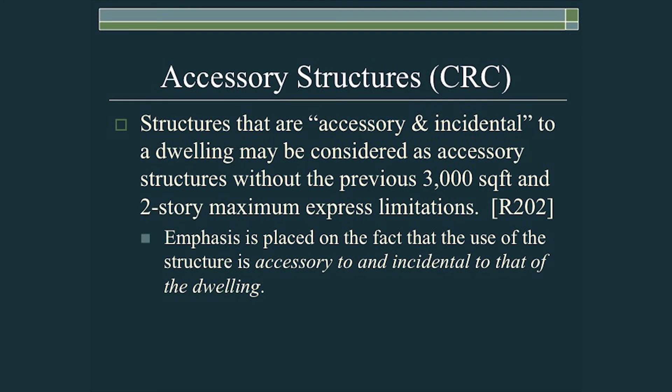If you take a look at R202 of the California Residential Code, there's an emphasis on the fact that the use of the structure is accessory to and incidental to the main dwelling. As long as that is the case, it can now be larger than 3,000 square feet. It can actually be more than 2 stories in height, as long as it is truly accessory and incidental to that main dwelling.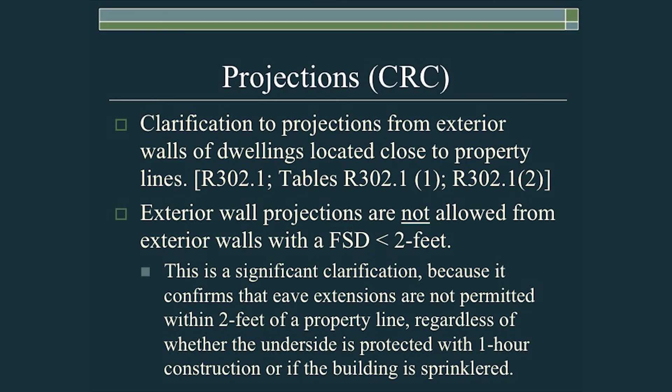Just as we saw in the building code, projections in the residential code have been modified slightly through a clarification. The limitation or protection of projections is similar to what it was before, but the clarification makes it very clear that exterior wall projections are not allowed from exterior walls if they are less than 2 feet from a property line. This confirms that eave extensions are not permitted within 2 feet of a property line, regardless of whether the underside is protected with 1-hour construction or even if the building is sprinklered.

This is pretty common when we have accessory buildings, whether it's a detached pool room, a detached garage, some type of building customarily associated with a main dwelling, regulated here in California under the CRC. As shown in this diagram, no projections are allowed when the fire separation distance is 2 feet or less. A lot of jurisdictions have regulated eave projections from the perspective of whether they're causing cross-lot drainage or other stormwater to cross beyond the property line.

Some jurisdictions felt that as long as you put a rain gutter on the bottom, it could be very close to a property line. In some instances, they would require the underside to be protected by 1-hour construction. That actually is not the case. The CRC now clearly makes it known that if it is within 2 feet of the property line, that projection is not permitted.

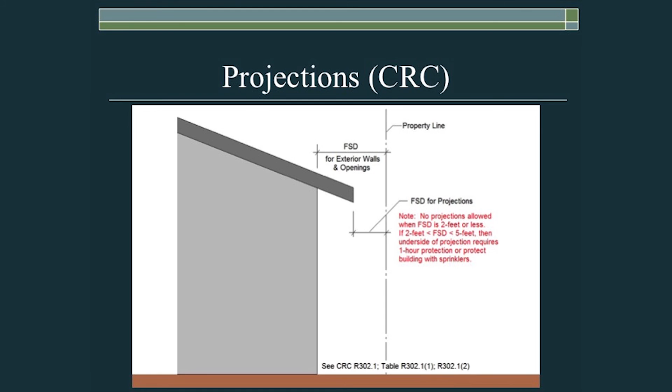A new requirement has been added to the California Residential Code, which now requires either a 1/2 inch layer of gypsum board or a 5/8 inch thick layer of structural wood panel sheathing on the underside of floors when that underside is exposed to an area which could be used for storage or placement of a fuel burning appliance.

R302.13 provides this requirement, and basically what it does is if there is an area, whether it is a basement or a partial basement, that could be used to store material or place a furnace or some other type of equipment that has a fuel burning aspect to it, either a 1/2 inch layer of gypsum board or that 5/8 inch structural wood panel sheathing needs to be provided.

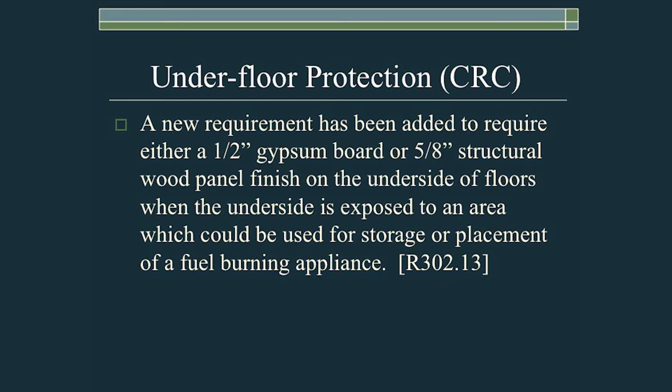The intent is to provide a little bit of time, a little bit of protection, so that if a fire does develop within that space, the occupants of the building have more time to get out. This is a nice change to the code.

Residential Code Section 310.2.5 has been changed in the model code, and basically what it does is make it a little bit easier to change out existing windows when those windows are used for emergency escape and rescue.

Sections R310.1, R310.2.1, and 310.2.2 are the pertinent sections. The minimum opening size, the minimum dimensions in terms of height and width, and the window sill height don't need to comply with those minimum provisions, provided the replacement window is the manufacturer's largest standard size window available that will fit within the existing frame or rough opening, and the replacement window is of the same operating style as the existing window, or a style that provides an equal or greater window opening area than the existing window.

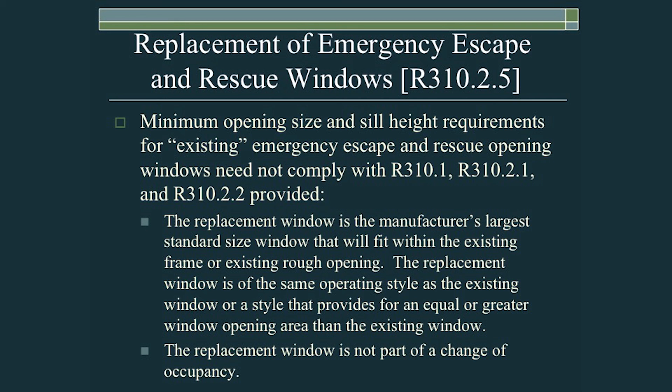So what this provision of the code does is allow that by right, as long as the window being proposed is the manufacturer's largest size that will fit within that space, and as long as they're not changing the type of window from either a slider to a casement or something else that would adversely affect the net opening, and as long as it's not a change of occupancy. So this will make things easier for most jurisdictions.

Last couple things I want to talk about: electrical vehicle charging, section R309.8. Newly constructed 1 and 2 family dwellings and townhouses with attached private garages shall comply with the EV infrastructure requirements in accordance with Cal Green, Chapter 4, Division 4.1. So what does this mean? Shall comply with EV infrastructure requirements.

What this means is if there is a newly constructed 1 or 2 family dwelling or a townhouse, if it has an attached private garage, it's required now that the infrastructure be provided that will facilitate conversion later on to allow the installation of electrical vehicle charging equipment. The EV charging equipment does not need to be installed now, but the infrastructure does.

So see Cal Green section 4.106.4.2.3 for the details regarding exactly what constitutes the infrastructure. And what you'll find is that there are some provisions in there which will give you guidance on whether or not 208 or 240 volt services are provided, what the raceway requirements are, requirements regarding the cabinet, requirements regarding at least a 40 amp overcurrent protection device. All those details are indeed located in Cal Green section 4.106.4.2.3.

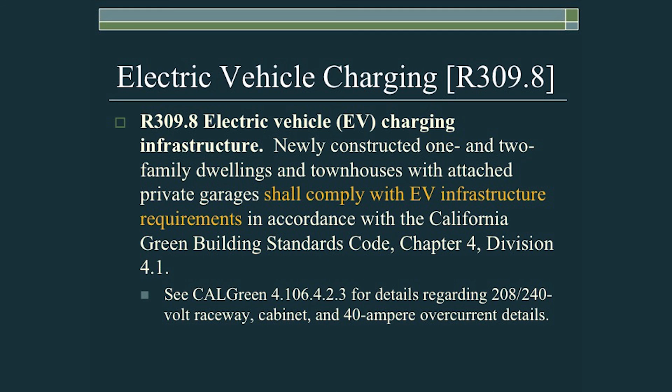And to close out, I would like to remind everybody here in California that we do have requirements for mandatory water efficient landscape ordinances, and in Cal Green Chapter 4, Division 4.3, those standards have been referenced. They actually have already taken effect. The WELO requirements took effect December 1st of 2015, but they are now referenced in Cal Green, and basically what's required is if you have a residential development and there is an aggregate landscaped area equal to or greater than 500 square feet.

Either a local water efficient landscape ordinance must be in place that addresses those standards, or the state's WELO requirements, whichever is more stringent, have to apply to the irrigation system. Of course, the requirements might require, in certain instances, a moisture detection system, so it determines whether or not the area to be irrigated is already sufficiently wet, thereby defeating the triggering of rain sprinklers. There are some requirements so that if it's raining, the irrigation system automatically is disabled and so forth.